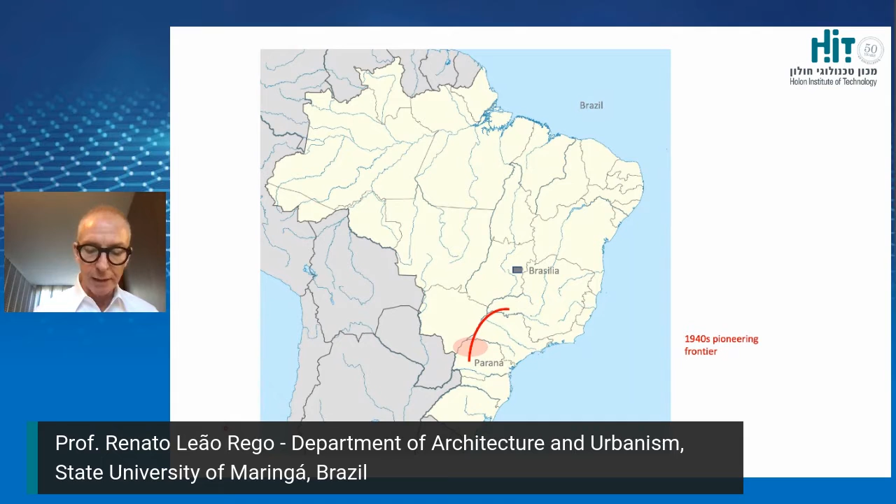I live in the north part of Paraná State, a region that was deforested, colonized, and urbanized in the first half of last century. Dozens of new towns were created from scratch, and the grid was the conspicuous planning tool. These towns were mainly designed by civil engineers according to the notion of town planning as urban art. By showing some layouts of these new towns, I will claim that a specialized grid revealed its particular relationship to the natural setting.

Later on, the pioneering agricultural frontier moved further to western North Brazil. Schools of architecture became more widespread, and by mid-century, when architects took the lead role in planning proposals, functionalist ideas prevailed. The grid then became less artistic and less specialized, lacking spatial quality. I will also provide visual examples to endorse this reasoning.

The grid has been deemed an instinctive tool for creating new towns, for no other parceling scheme seems so easily outlined, yielding uniform plots plainly describable in deeds. It is advantageous from the commercial point of view, as it offers none of the problems that irregular plots and curved perimeters present to planners, who can easily calculate the area of standardized orthogonal shapes.

However, the grid has been criticized for a calculated indifference to the natural setting, and has been taken as the physical equivalent of the laissez-faire economy, the perfect plan for the capitalist city, generating urban forms strong in private spaces but weak in public ones. Moreover, its principle of order, regularity, simplicity, and practicality can become rigid and lack interest if mechanically applied. For the grid is neutral, non-hierarchical, and appears monotonous unless infused with special content, thus gaining individuality, hierarchy, and aesthetic appeal.

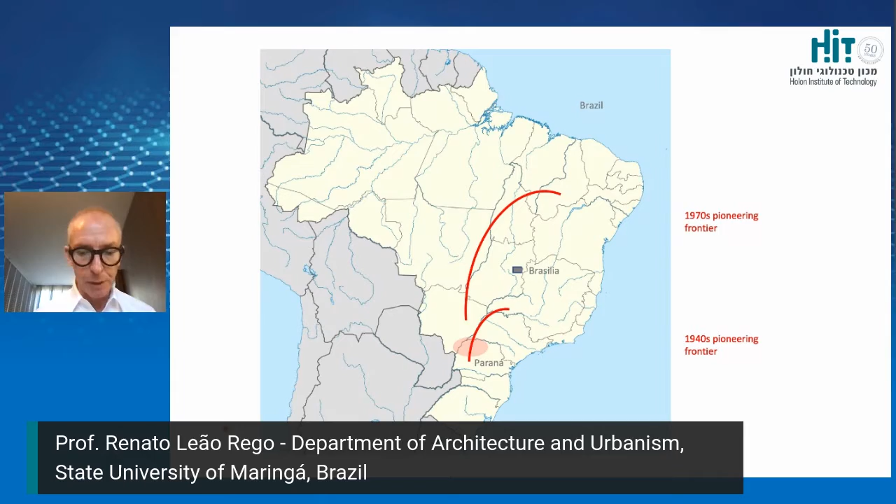The colonization scheme of northern Paraná State, the region where I'm speaking from, applied straight lines to connect streams and ridges, the natural lines of the terrain. It thus easily defined more or less rectangular rural plots that had direct access to water and transportation, as roads were always built along the ridges.

New towns in this region were planned when town planning was being formed as a field of knowledge in Brazil. Engineering schools then offered regular courses on town layout based upon City Beautiful lines, focusing on urban beauty, sanitation, and traffic issues. Thus, a sensitive design avoided the unfavorable abstract uniform grid, achieving considerable levels of legibility, identity, and interest. Therefore, different urban forms are noticed.

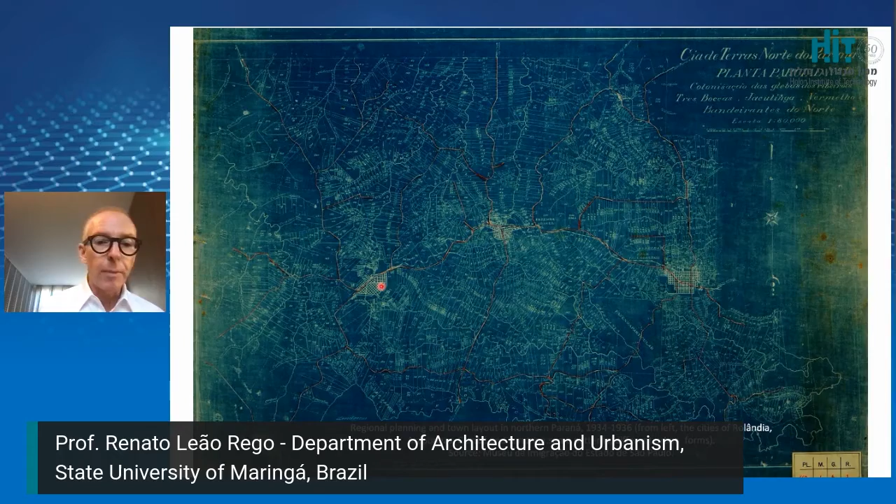I'll talk about this one now, the city of Rolandia. The city of Rolandia was shaped according to the site. The rationale for the grid orientation in this town was the railway and the curved perimetric avenue that encircled the plateau and preserved the adjacent streams. The focal point of the layout was the train station, from which three diagonal larger avenues lead to the town hall, church, and school in the city center.

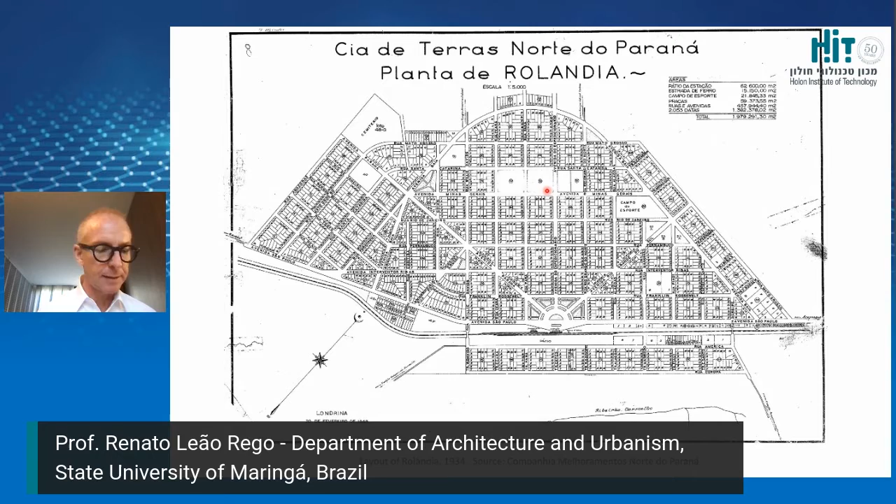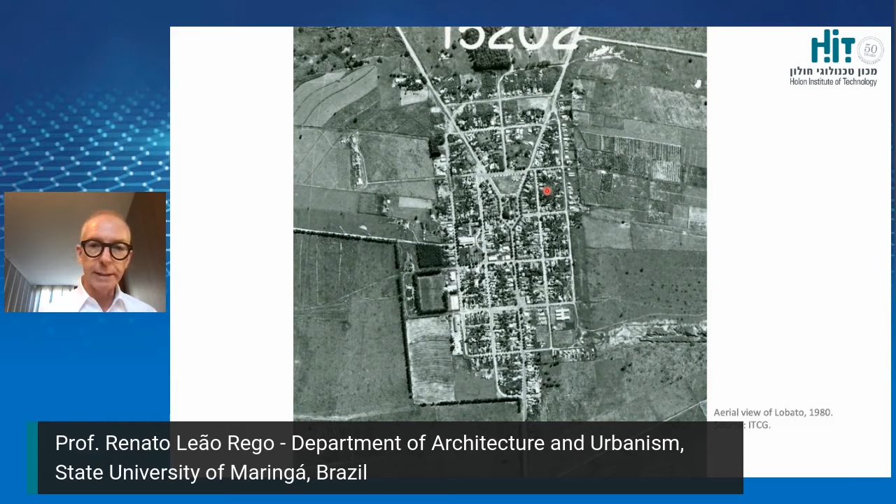The cemetery on our left and the sports facility on our right, with entire blocks reserved for those buildings, strategically positioned on the grid, created singular events in the urban tissue. The trident was a common artistic motif which established centrality, focal point, and suggestive views even in small urban settlements like this one on the screen.

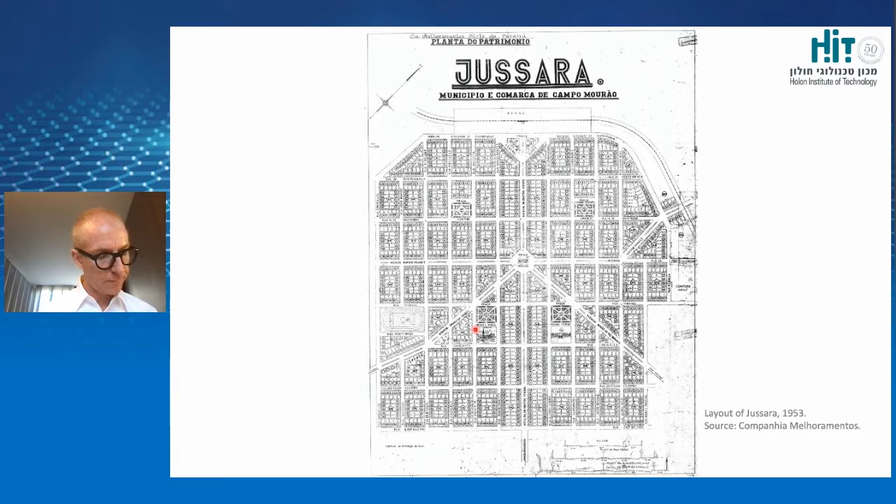A similar solution can be found in Jussara, a small town on flat terrain. Its gridded plan had a clear-cut central square on which six tree-lined avenues converge. Symmetry reinforced the artistic aspirations of the city layout. Four public squares and the adjacent school and Catholic church specialized the otherwise indistinct grid.

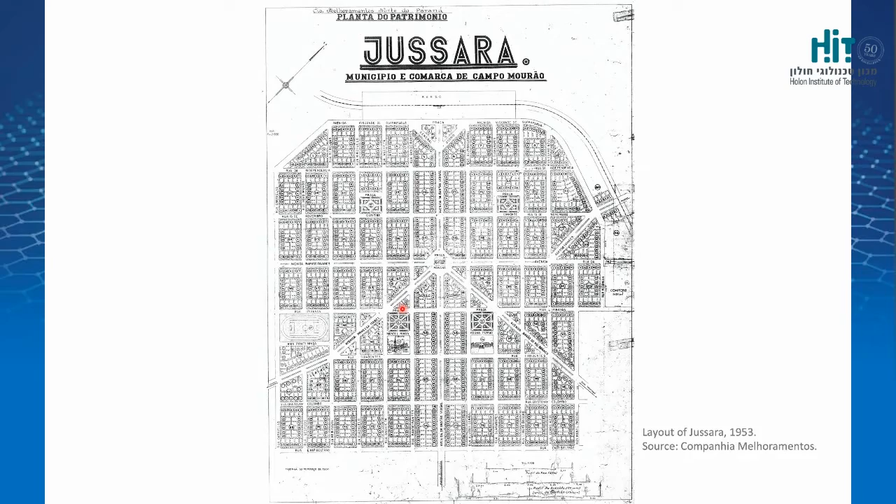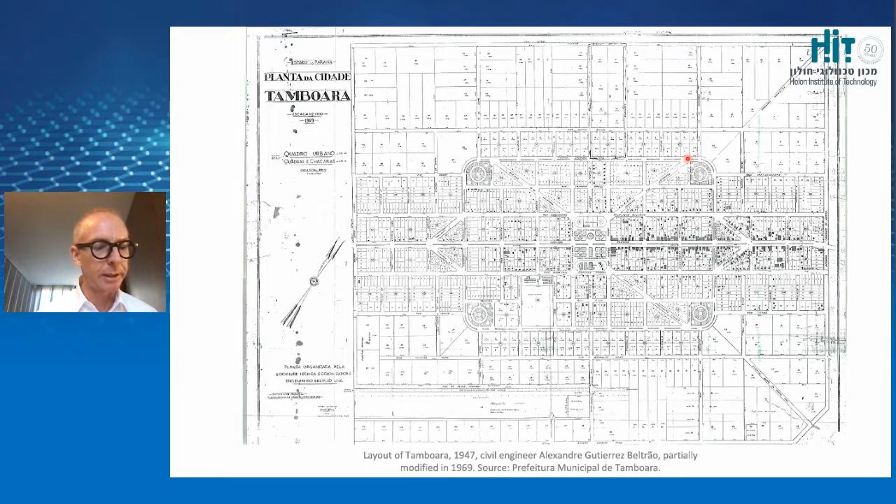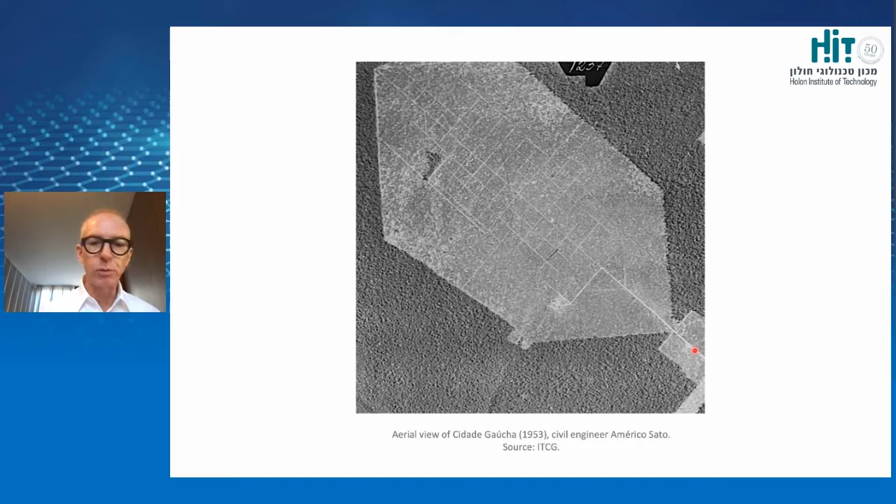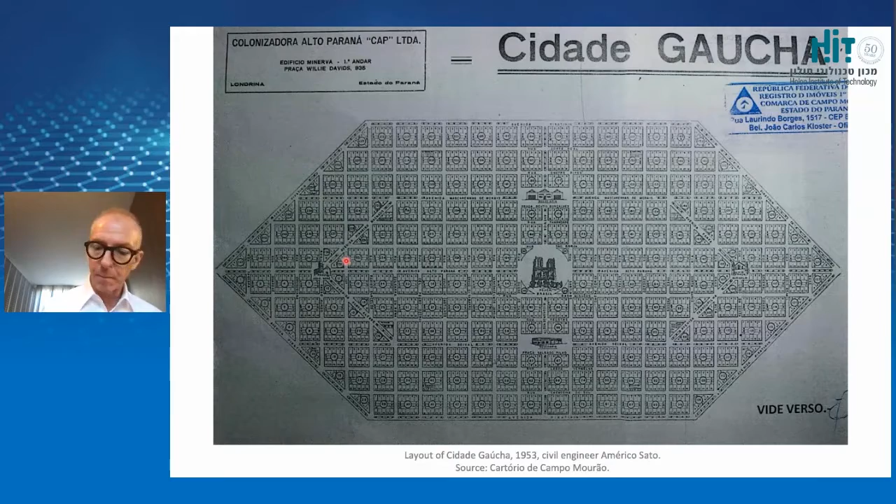Likewise, Cidade Gaúcha also adopted a linear design shaped by the access road on the main ridge and adjacent watercourses. Its gridded, hexagonally shaped plan imposed on the deforested site accommodates the main public buildings—the town hall, Catholic churches, and bus station, schools—in a symmetrical and strategic position in public squares at the crossing of perpendicular or diagonal tree-lined avenues. This was clearly intended to create striking perspectives and artistically customize the grid. A hybrid urbanism is noticeable in the plan of Maringá due to garden city principles.

Straight orthogonal streets were thus integrated with the winding ones, which conform to the topographical contour of the site. The individuality of the town layout is mainly attributable to the site features, as the city layout was molded around urban parks and preserving nearby streams. A predefined shape was avoided, even though the urban tissue is gridded in the civic center, where the terrain is flat and formality called for.

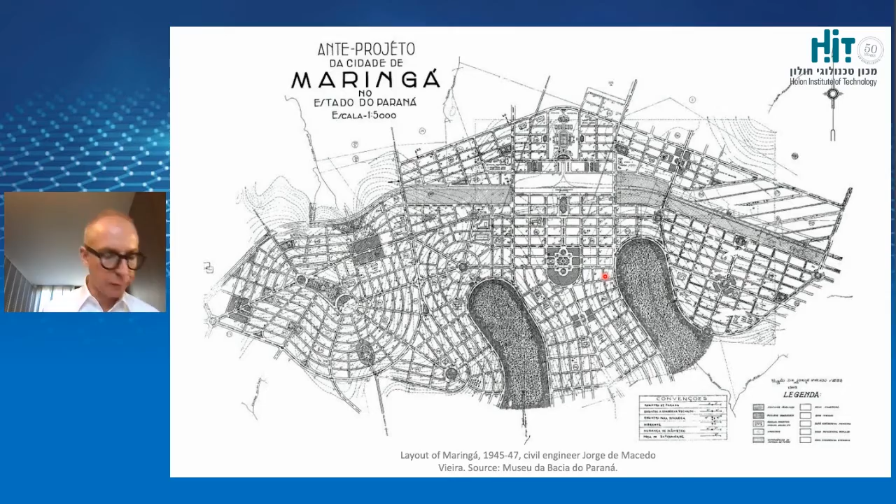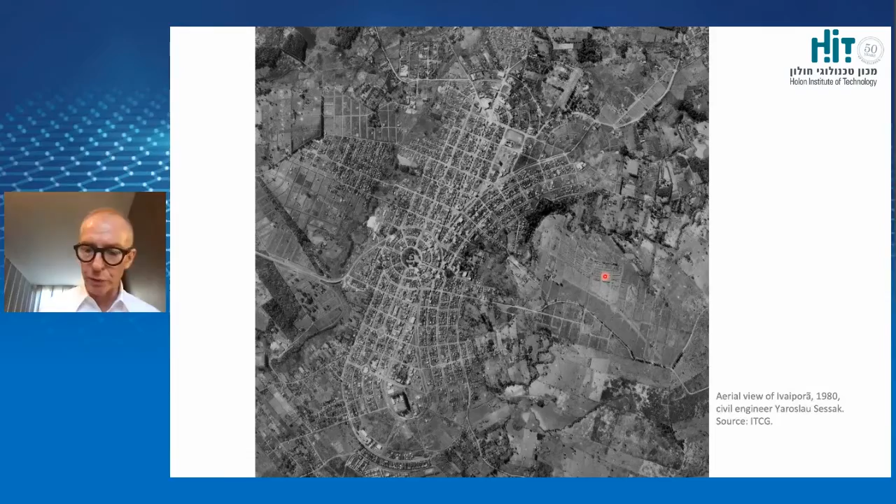A similar approach is evident in the Ivaiporã plan, albeit with a more arbitrary shape intended to artistically adapt the grid to the site contours. The street width and the tree lining helped define the status and hierarchy of urban roads, and junctions have been understood as potential focal points for special treatment in order to create grand perspectives.

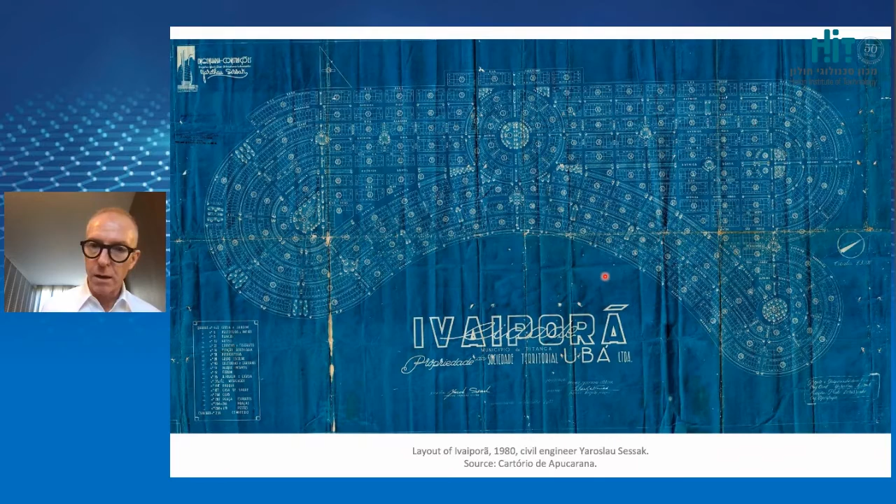Nevertheless, the rationalist discourse on urbanism excluded traditional planning and all kinds of explicitly formalist approaches, inadequate to modern necessities. The form of the city was then defamiliarized and reformatted. The construction of Angelica put into practice the functional city idea in Brazil, paving the way for the disappearance of artistic features in the town layout.

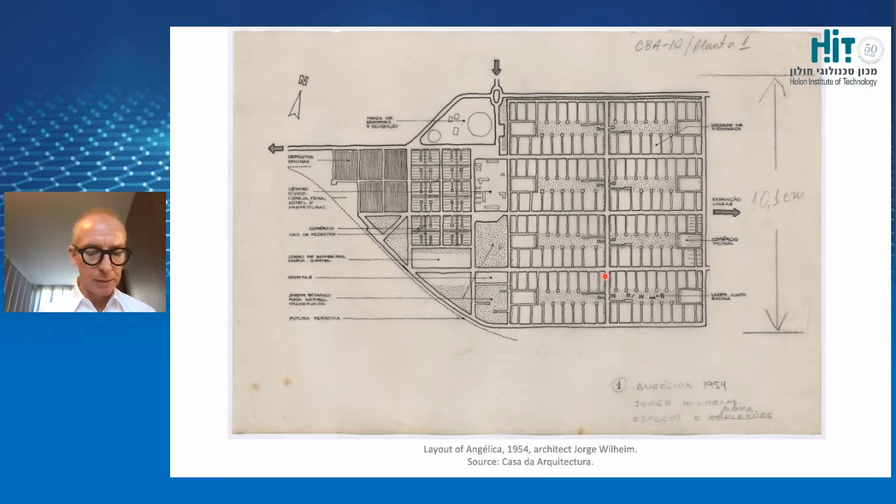Functionally segregated, the rationalized grid organization conveyed a somewhat abstract layout. The rectangular, orthogonal, standardized residential sectors were planned according to the neighborhood unit concept and thus isolated pedestrians from vehicles. Artistic features were not present in this layout, and the mechanically applied open grid could be extended indefinitely as the city grows. Like many others, the positivist layout of Angelica classified, separated, ordered, and standardized the urban form for the machine age.

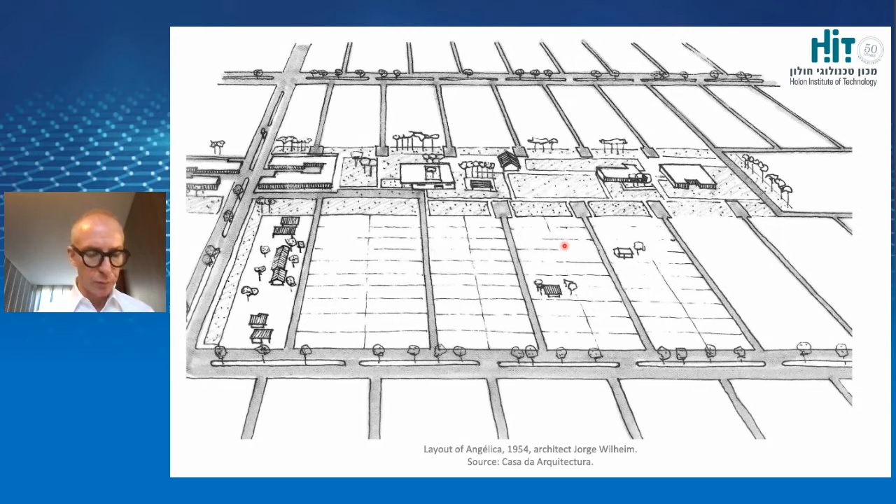Consequently, undistinguished gridded residential areas were created. The scientific approach of functionalist urbanism prevailed in Brazil since Brasilia. It worked to find the minimum elements of each urban function in order to achieve the simplest design solution, which was to be applied even to more complex situations. While the plan grid was then praised for being practical, rational, geometric, and abstract, the townscape inevitably was impoverished with the loss of individuality.

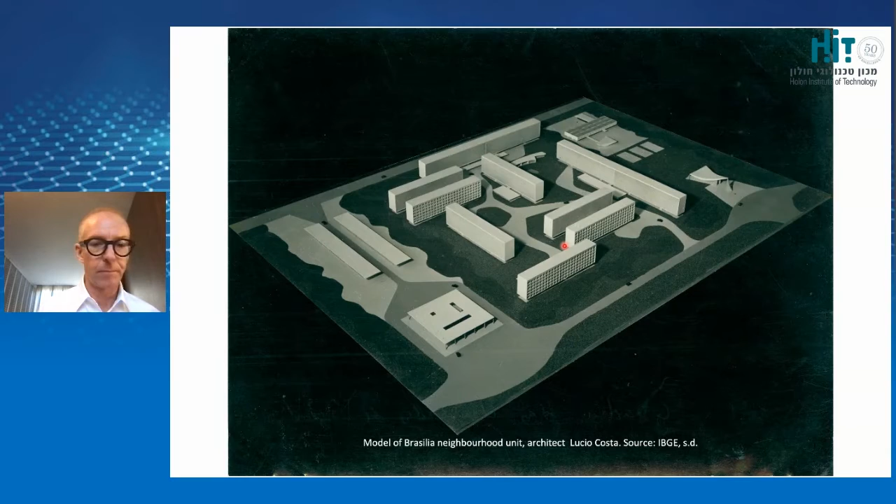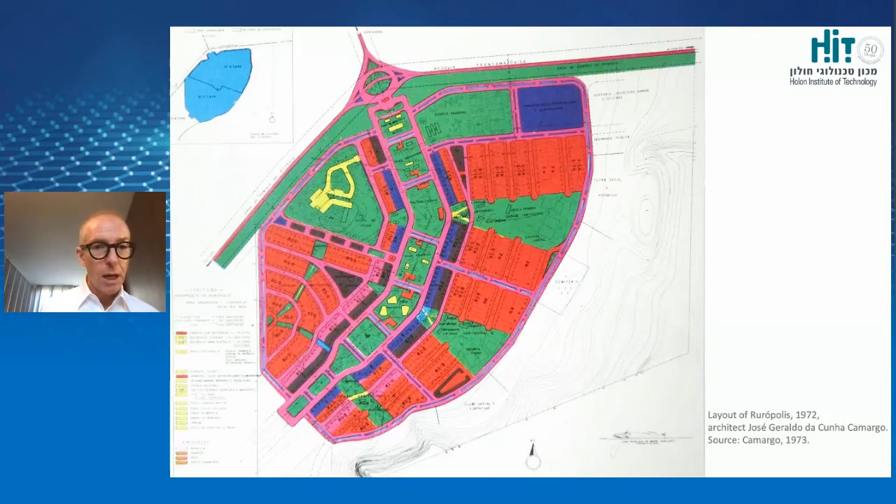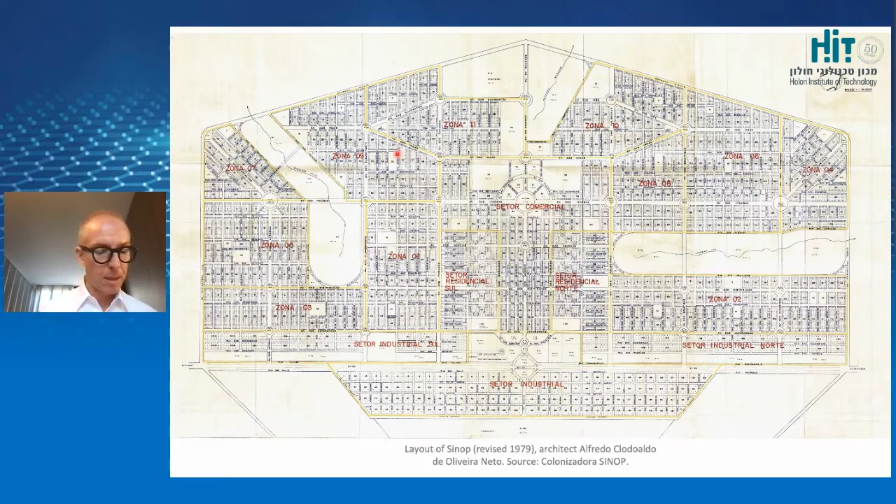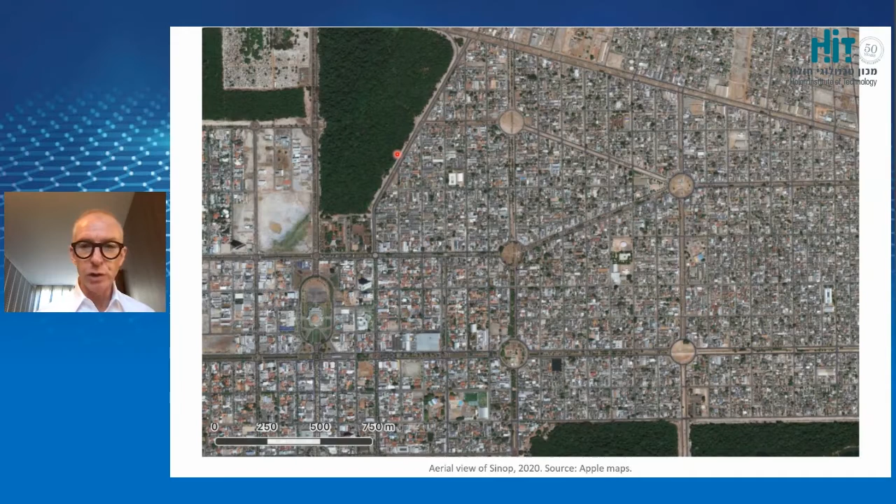In Sinop, low density, large urban plots, regular shapes, a grid pattern, a symmetrical arrangement of some diagonals, and ubiquitous roundabouts were adopted. On an absolutely flat terrain, the symmetrical grid was composed of very wide streets and avenues, ranging up to 50 meters in width, enhancing a horizontal, monotonous townscape.

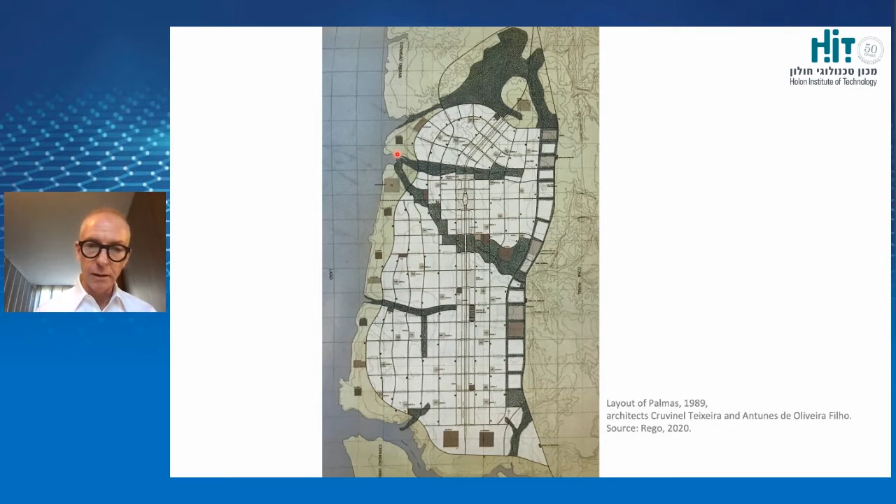The vastness of Sinop can also be seen in Palmas, which is also a gridded city for the machine age. Its main urban axis, 150 meters wide, includes 2 avenues of 4 lanes each, plus parking areas on each side, a median strip, and compulsory setbacks.

In addition to its surrounding natural setting, the gigantic grid, wide avenues, functional zoning, and the adaptation of the neighborhood unit concept are also notable features of the city. The town layout exhibited a relative centrality, the administrative center, in an otherwise non-hierarchical linear form. City functions were segregated and residential areas were shaped in orthogonal macro blocks.

To conclude, in the examples I have shown, the rectangular or square grid plan formed the initial template upon which designers could specialize the urban form by adapting it to topographical conditions and adding other morphological elements and artistic motifs for environmental, symbolic, and aesthetic purposes.

All of the examples were of towns planned from scratch, but the lessons learned are also valid for urban expansion. The gridded spaces examined here were attuned to different cultural values and historical circumstances, but relate all to the quest of building better planned urban worlds.